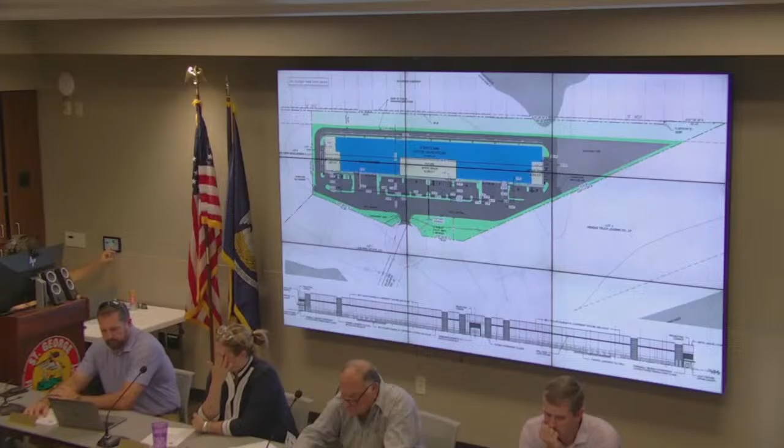The request is a new final development plan and site plan for Piku Place planned overlay on lots 4 and 5, now tract 4-A of Piku Place subdivision. This request is the fourth final development plan within the PUD-13-06 planned overlay for the Piku Place development. The request also meets the site plan threshold for zoning commission approval, therefore a concurrent site plan request is required. The applicant proposes a new 112,500 square foot office/warehouse with an access drive to Park Bluff Drive. The applicant proposes 25,279 square feet of office space and 87,221 square feet of warehouse space. The combined office/warehouse requires 101 parking spaces and 125 spaces are proposed. The proposed office warehouse also includes 10 loading bays. Staff finds that the final development plan and site plan comply with the applicable technical requirements and review criteria of the UDC and therefore recommends approval.

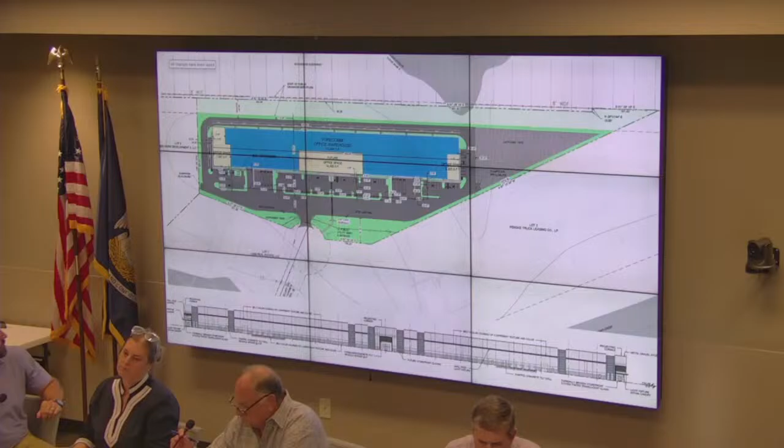Applicant, you got any comment? We are providing the request of the neighborhood behind us that we change the drainage, and we're going to definitely have riprap in the construction plans to prevent any kind of erosion of that channel there. I think we've addressed everything that needs to be addressed, but if y'all have any questions, I'm here to answer.

Question? All right, this is a public hearing again. Thank you, Mr. Corey. I got two comment cards. Mr. Campbell, did you want to speak on this? There's a card up here - Craig Corey again, that's already spoke. Yvonne Reed.

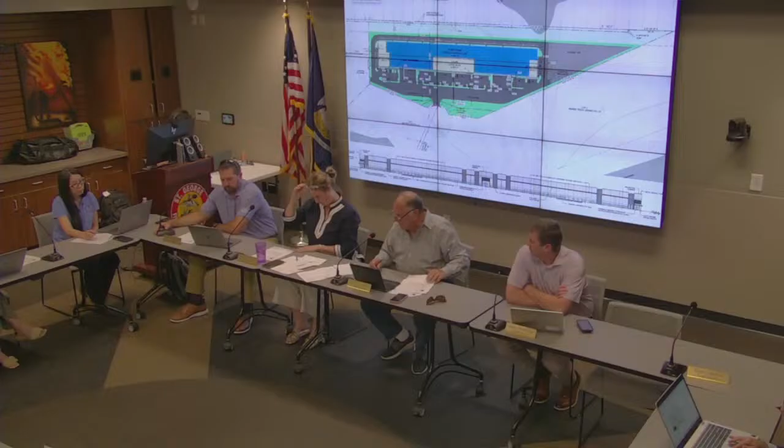Motion? Second it? All in favor? Aye.

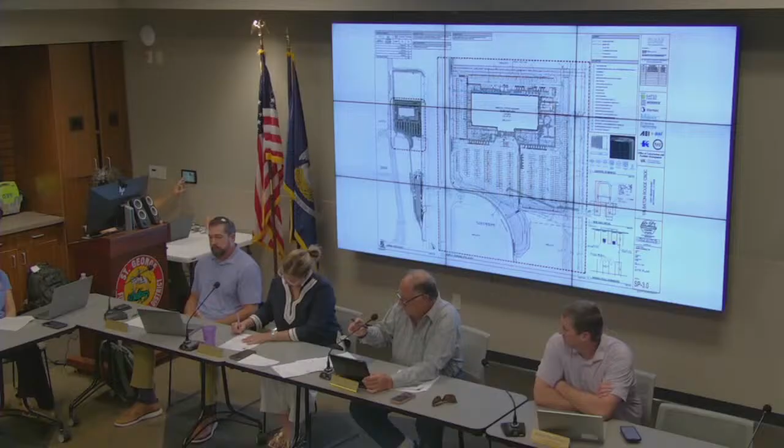I assume y'all are the applicants? Good evening. My name is George Papandreas. I'm with Carnegie Management and Development Corporation, their executive vice president.

I am representing BRBC, who is the applicant. Carnegie is the managing member of the applicant, a wholly owned subsidiary of the entity. We're also the developers who, on behalf of BRBC, are seeking your approval here tonight. I have with me my team: Mr. Morgan France, our pre-construction coordinator, and Andre Rodriguez from Stantec, our civil engineer. They're going to follow up with more descriptions of the project and technical presentations, if appropriate, based on the questions that might be asked.

I want to thank you for the opportunity to be here today. We're really excited, and we thank you for your time in giving us this ability to present to you, which fittingly falls in the wake of the 250th anniversary of our great country. We are here seeking your approval tonight on this site plan for the VA clinic, to deliver a first-class facility providing world-class health care to the VA and our veterans. I think that's really critical to point out.

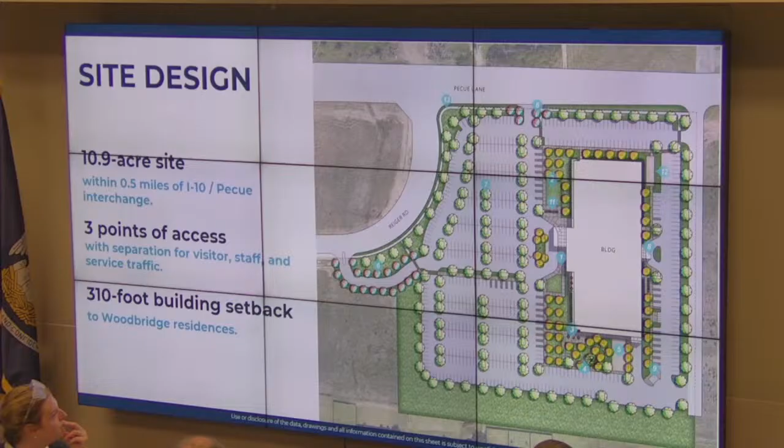This will be a clean, safe, and beautiful campus. This is a VA, a federal facility - there is 24/7 VA police monitoring and facilities management to keep the site very clean and tidy. We also have robust landscaping to promote a healing environment for veterans and staff.

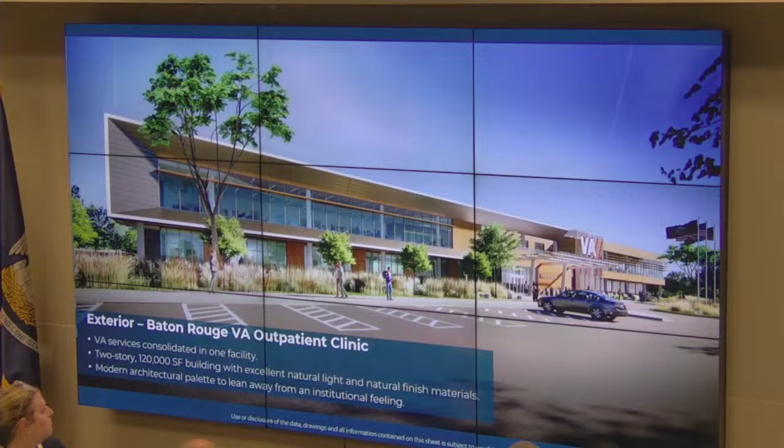It's a 120,000 square foot building to consolidate the services previously mentioned. This is essential to providing care for veterans, as they will no longer have to transit between two different sites, and they'll have access to even greater expanded services at this facility. It's a modern architectural palette leaning into contemporary healthcare design, moving away from institutional and more toward hospitality and care for veterans. I'll quickly show you some renderings of the interior lobby, then pass it over to Andre, who can speak on the technical details of this facility.

I'll conclude my portion of the presentation by saying it's absolutely essential that we request the commissioners and the board grant us site plan approval with the 3 accesses shown: the 2 right-in, right-outs on Pecue Lane and the full access curb cut on Rieger Road. As Andre will mention, the traffic study confirms there are negligible impacts to existing traffic conditions, and no stacking issues up into the intersection of Pecue and I-10. The Louisiana Department of Transportation and Development has concurred with this approach via an approval letter they issued to us about 4 weeks ago.

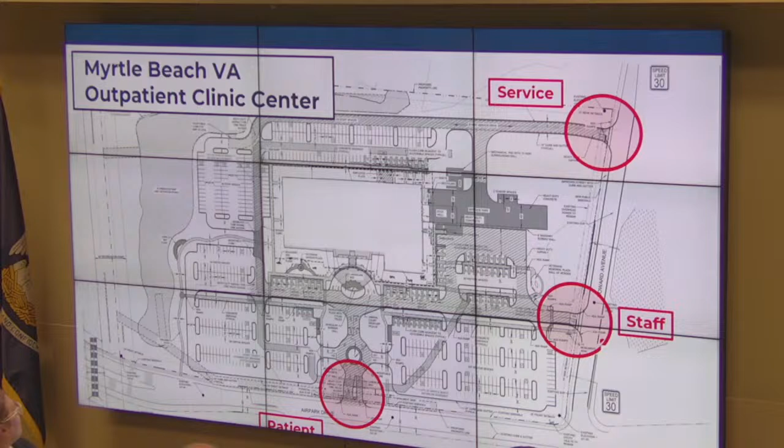So time is short here on a presentation, so I'll make it quick. From a technical standpoint, this site and facility in Baton Rouge will have 600 parking spots to accommodate visitor, staff, and patients throughout the site. As they mentioned, it's just under 11 acres.

With this development, we are proposing to put in a stormwater basin that will not only serve this site, but also additional acreage and areas in the area. We look at it more as a regional stormwater management facility, with peak flows looking at fully developed flows for the entire area that's draining right now through this area.

Draining further from west to east, with portions of it going through Woodbridge subdivision. As Woodbridge subdivision was created, there were provisions put in place to accommodate the flow. The natural flow was going overland through that area. As it was developed, they put in certain outfall points. With this development, we're looking to reduce the peak flows going out to those outfall points anywhere from 10% up to 87%.

That's a reduction, not an addition, in flow. With that will also be the amount of volume flow going downstream. It'll be spanned out over a longer period, therefore having no adverse impacts to any of the systems downstream. That's all in conformance for the 2, 10, 25, and 100-year events in accordance with the St. George UDC.

We also performed a traffic impact study, which is not required by the City of St. George. We went above and beyond that because when we reached out to DOTD, they asked us to look at the capacity impacts for the signals at Rieger and Pecue Lane, and also Airline and Pecue Lane. We did that in accordance with their criteria.

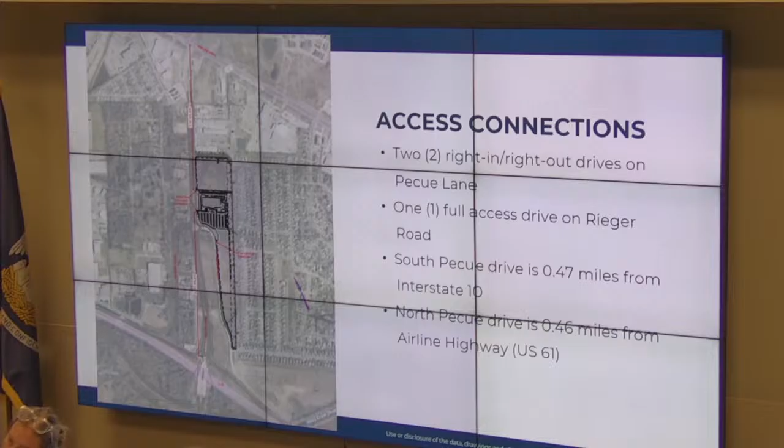We further laid out the layout of our driveway on Rieger Road, which will be our full access, allowing left in, right out to come into there. That is well beyond any queuing in those proposed full build-out conditions. We have maximized the most effective layout of our driveway and access connection points. They do not violate any state, federal, or policies that we know of from AASHTO, DOTD, or Federal Highway Administration. With that, I'll leave it up to any questions.

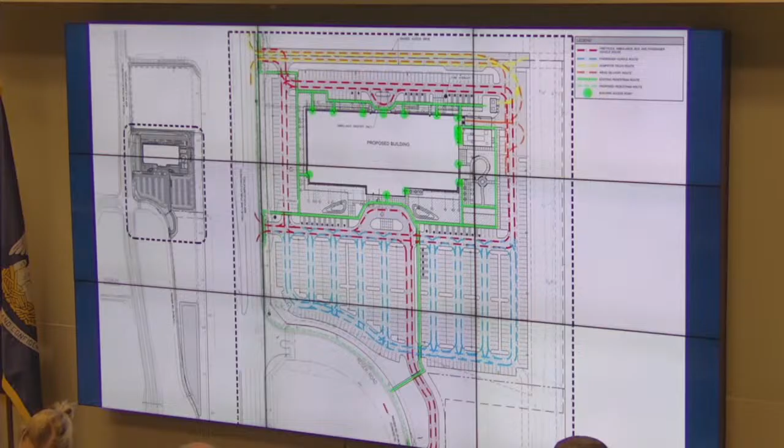Any questions, commissioners? I don't, just my ignorance of the process. Why wouldn't this be an access, this be an access, this be an access, this be an access?

Well, the VA looks for 3 points of connection on a thoroughfare, and that is technically a driveway. So while it does look like that would satisfy the requirement, it does force staff and logistics traffic to share one curb cut on Pecue. This one here, staff and logistics traffic would still have to share that access point, creating a conflict in the eyes of the VA. That's only an access in the eyes of the VA because it's a shared drive.

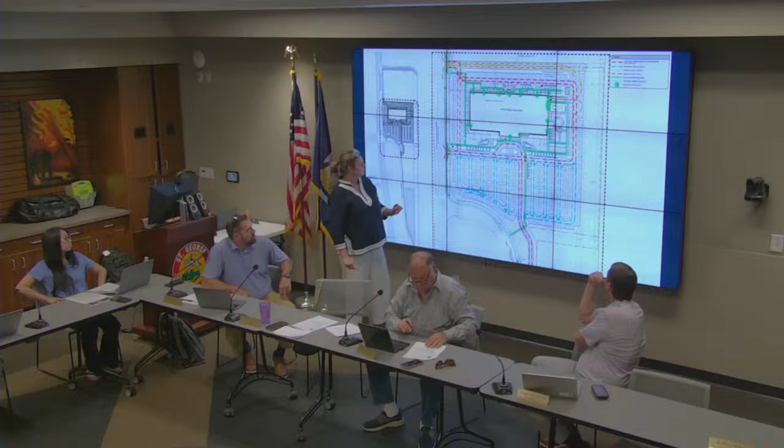Because we all know this is going to be the main entrance right here, right in right out. Whether or not you call it your main entrance, this is going to be the entrance that everybody uses - people wanting to go northbound. I won't disagree with that. People wanting to go southbound cannot utilize that. If they want to go back to the interstate, they will not use that whatsoever. And I believe the majority of the traffic flow coming through here is coming from the interstate.

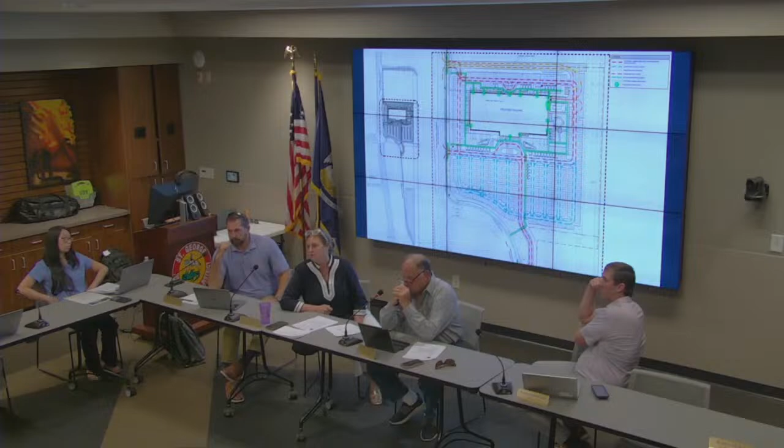Yeah, but they're going to want to go back to the interstate, so they're going to utilize Rieger Road. I just think this is going to be the main entrance. And if it's not as attractive, being staggered off some, maybe it'll deter some people from using it if it doesn't look like a main entrance. Well, welcome to my world of trying to figure out how to lay out a building so that it is attractive, so that people can recognize it. The reason this was facing south towards Rieger Road is so people coming off the interstate can see it and recognize where the front door of this is going to be - off of Rieger Road.

We purposely did not place it facing Pecue Lane, just for what you stated - we did not want to identify Pecue Lane as the front door or main access. But it is beneficial, because if we do not have these three access points, it disrupts our traffic distribution and patterns, which can then have an adverse impact on the queuing and stacking of traffic at the signals at Pecue and Rieger Road. The most effective way to diversify traffic before it gets into the public right-of-way is to provide strategic location of driveways. You add more in a strategic, safe location, and that's what's presented here.

Andre, this may not be for you, it may be for the representative from Carnegie - but is there a way for us to potentially see this through and move forward with something tonight that we can possibly work on in the future? I know you guys were saying that potentially this is part of your lease that was somewhat of a contract, correct? You were saying that the lease is somewhat like a contract for you guys?

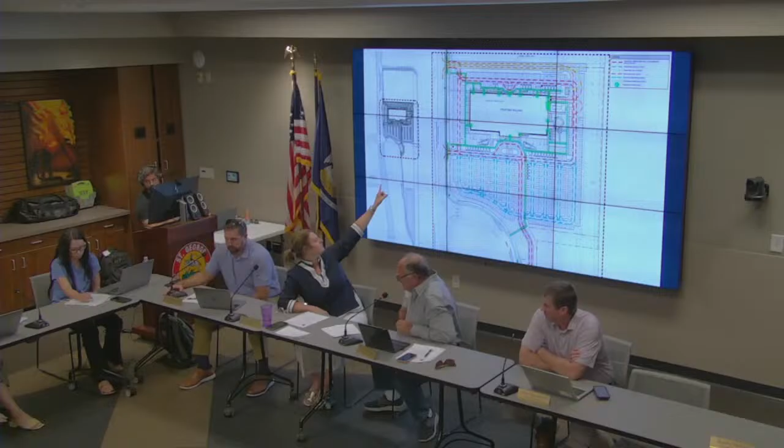Anyway, that's my motion. We have a second? Let's do a roll call vote, please. You said Aguilar? Yes. Motion approved. Thank you, gentlemen.

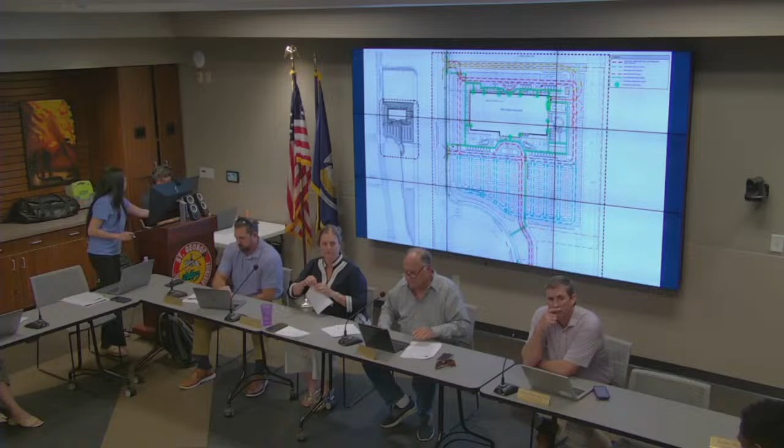Thank you for your time. Thank you for your time. We look forward to working with you. If y'all will contact Bryant, we'll get on as soon as y'all get hold of him. We got Brian, we know. Okay, if y'all can't get him, email me and I'll get him for y'all.

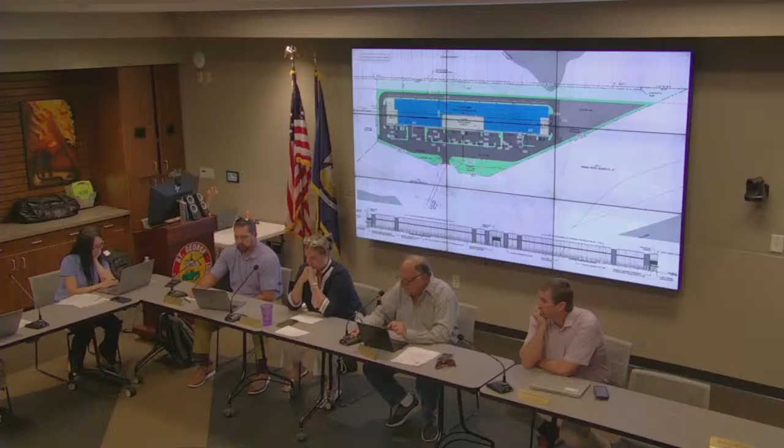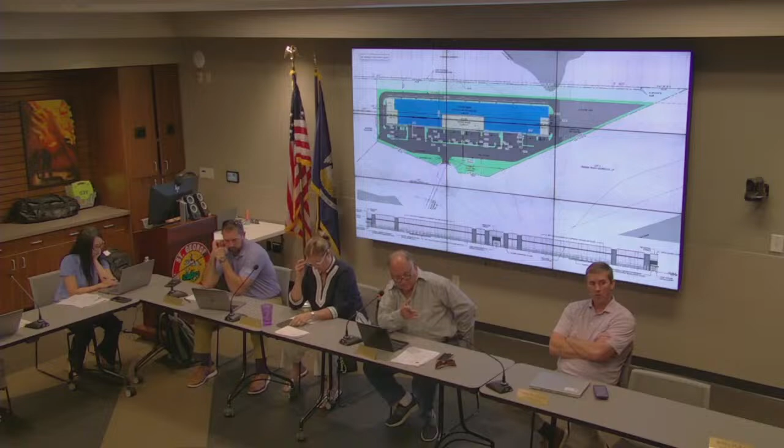The client does a drainage study, submits it to the city, the city reviews it, and all city engineers are very, very good. They do this all the time for other projects all over the state, actually all over the southern part of the United States. They're very good at what they do, and they also do traffic studies, but the client does the original traffic study. Is that correct, or do we do the traffic study, Brian? Typically, it could go either way, but for some projects the client will do the traffic study, and we review and submit comments if we have an issue with it. We also have the opportunity where the city itself can do the traffic study and compare it to whatever's submitted to us if there's a disagreement.

I'm sorry, we're not going to do a question and answer session here. If you want to make a comment, we'll let you make a 3 minute comment, and then we're going to close the public hearing. Does anybody else want to speak on this? Anyone? There being none, we'll close the public hearing.

Commissioners, we got any other questions? Finn, Bryant, anybody? What's y'all wishes? Motion approved. Do a roll call vote, please, again. Yes. Motion carries. We have any other business?